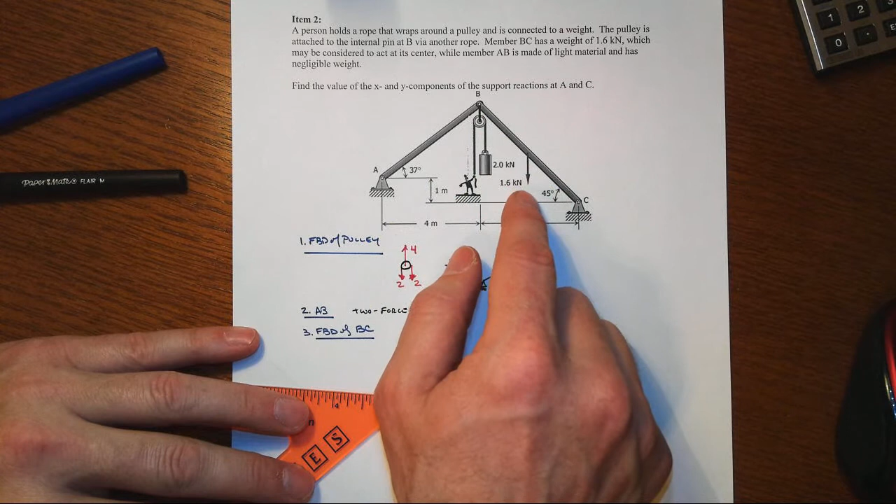And then we also have the self-weight of member BC acting at its center of mass, 1.6 kilonewtons, halfway along its length. AB is considered to be weightless.

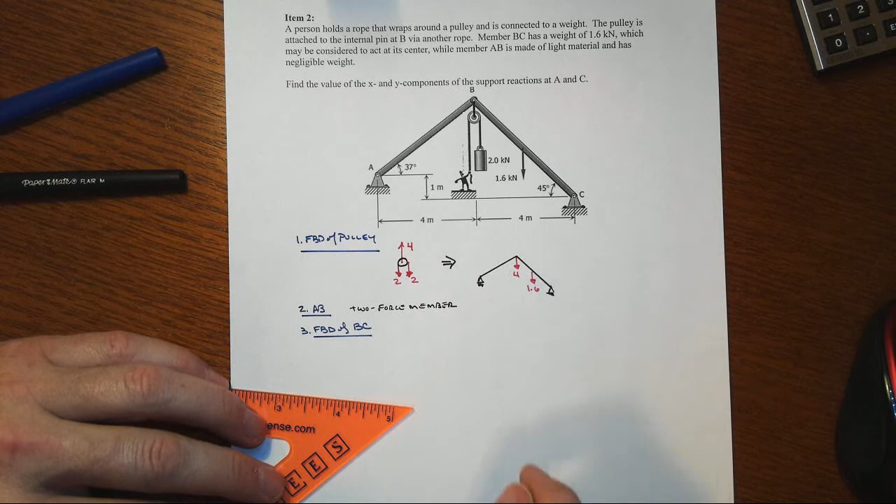You see the angles of inclination. You go look at that pulley, and so with the person pulling down to keep that weight in equilibrium, you got 2 and 2 on either side of the pulley. That means you got 4 kilonewtons that are needed for equilibrium of the pulley, and that means in terms of the frame, what it sees is a 4 kilonewton load pulling down at point B, along then with that self-weight of 1.6 of member BC.

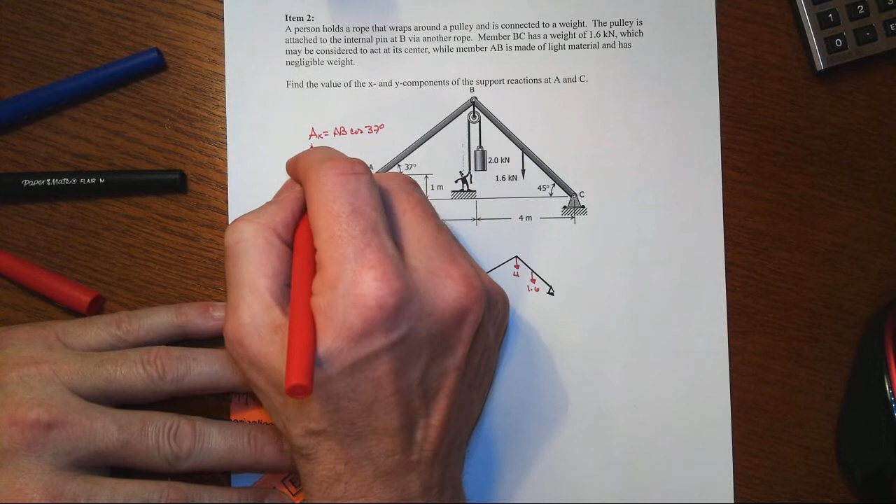Recognize that AB is a 2-force member. That means that when we've been asked to find our 2 reaction components, AX and AY, AX is going to end up being equal to the force in member AB times cosine of 37 degrees, and AY is equal to AB times sine of 37 degrees.

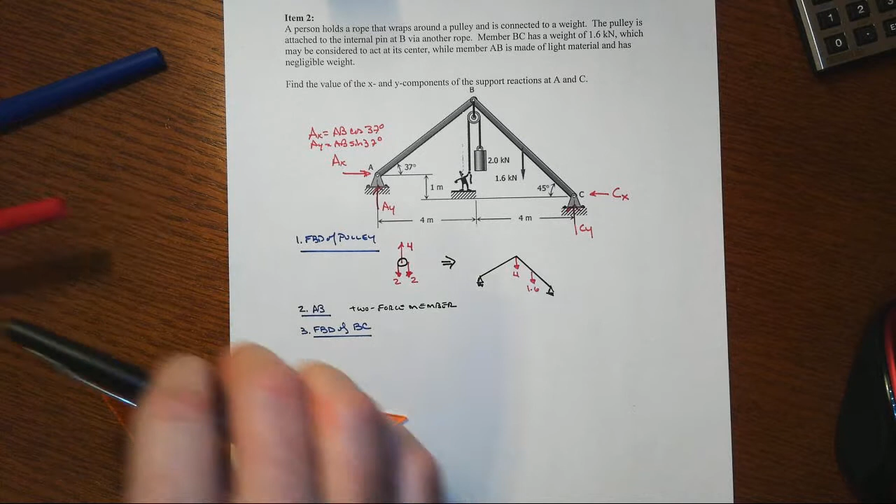Can't say that about CY and CX. We don't know what the angle is that those 2 would resolve along to, because we don't have a 2-force member over there. But we can simplify this problem in the initial setup.

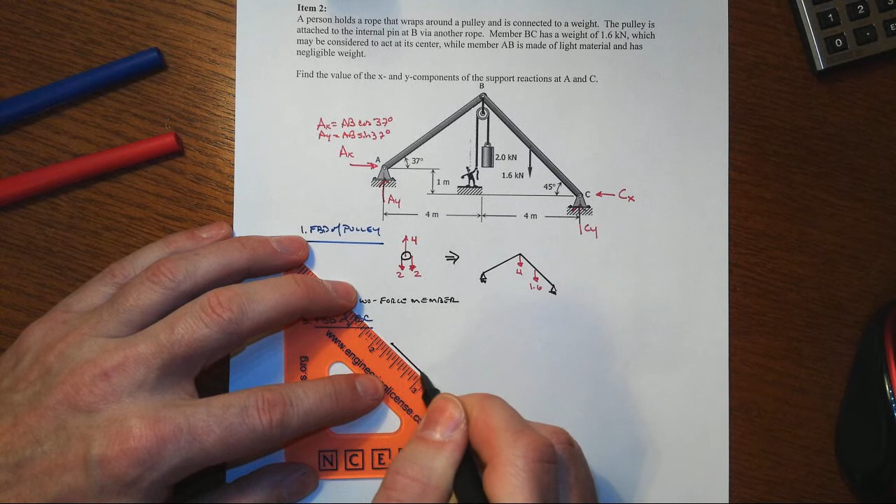So let's go get member BC in and start getting some forces laid out on this body. We got the 4, that's the applied load up there at B, and we got the self-weight, 1.6.

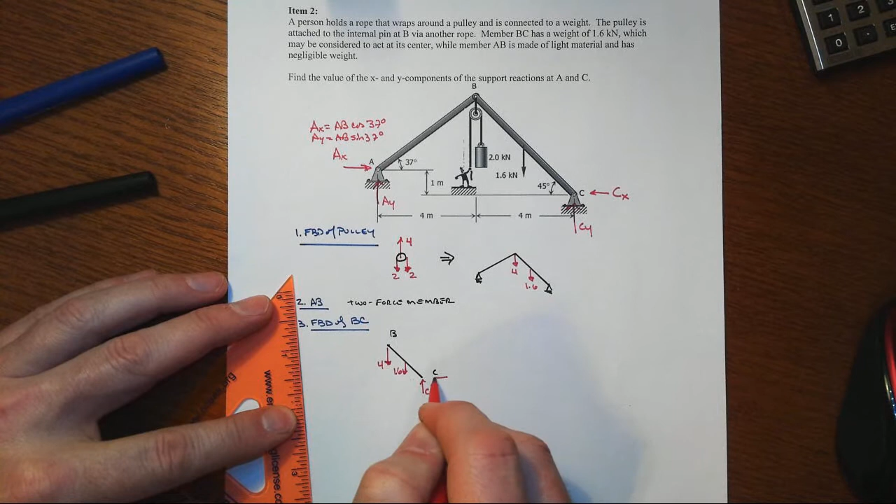We've got then our CY, our CX that are unknown, but we're trying to find them, and then we've got the force in the member AB.

So let's see what we can do here. If we were to sum moments about point C, we could find AB directly. And so let's go give that a whirl. Sum moments now about C.

Say clockwise is positive. And I'm going to decide that I'm going to slide AB all the way down to a place where it intersects this horizontal line coming from C. That means that I get a right triangle that's formed.

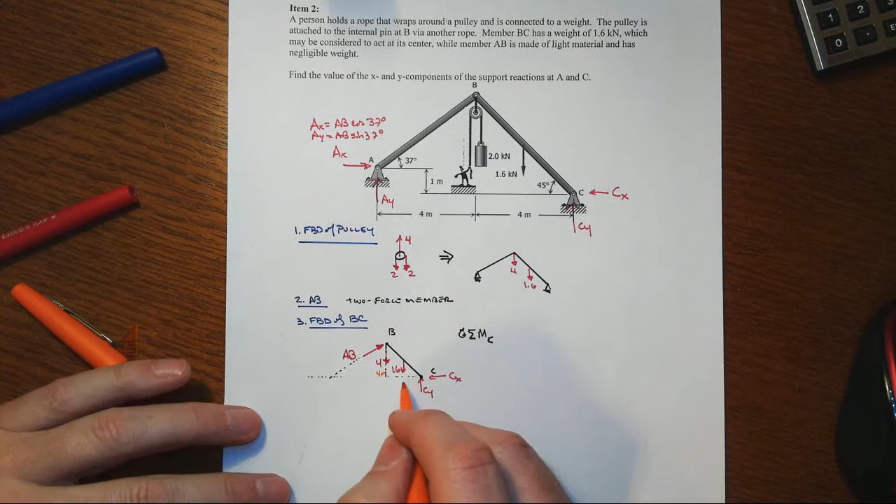Here it is 4 meters high. We've got 4 meters from this point over to C, and so then we just got to go figure out, with that being 37 degrees, what this distance is from there to there. That's going to be opposite over adjacent equals tangent, so that's going to be 4 over tangent of 37 degrees, or equal to 5.308 meters.

That's going to be useful, because now we can break up AB back at that location. When we do our sum of moments about point C, we can take the vertical component, which is going to be the sine of 37 degrees, so AB sine of 37 degrees is...

You know, we don't really care, do we? Because we don't care what the force in the member is. We only care about what AY is, and AY is equal to AB times sine 37 degrees.

So why not just go AY? That's going to translate down to here, right? Times its moment arm, about C, of 9.308. You're going to say, AY doesn't act there, it acts over at A.

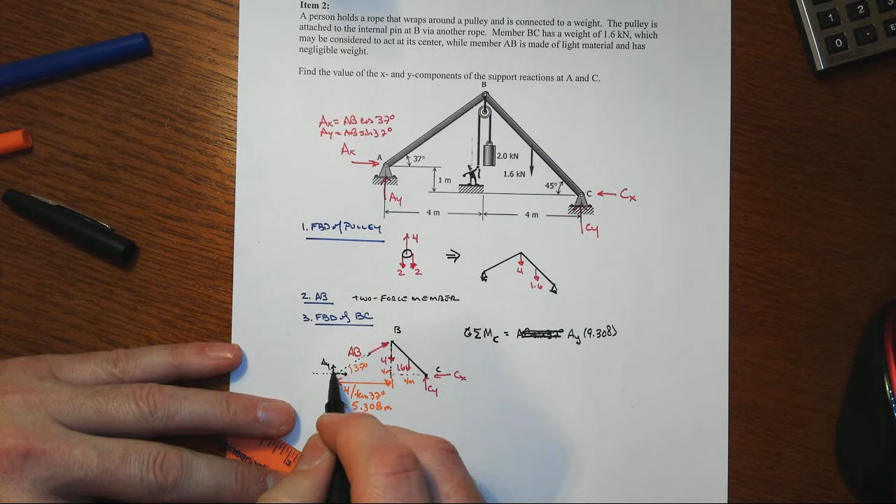But guess what? AY was exactly equal to AB sine 37 degrees. I can slide that AB force all the way along its line of action, and I get back over here to this fictitious point that we could call point D. So it doesn't matter that point A is somewhere else, and I can move that right on over.

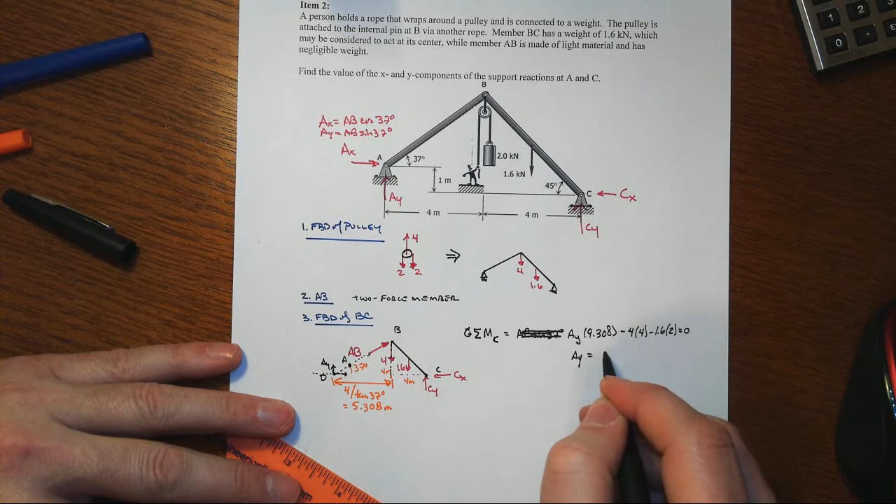So then we get minus 4 kilonewtons times 4 meters minus 1.6 times 2 meters is equal to 0. Solve that, then we get 19.2 divided by 9.308, and it's going to be 2 and change.

19.2 divided by 9.308, and we get 2.063, in the direction we got shown. That's, of course, newtons.

We can then sum moments about... we can sum moments about point D, can't we? Because when we do that, AB goes away, CX goes away, and we can get CY. We like that. Let's take counterclockwise positive. We'll have a moment arm of 9.308 for CY.

And then we get minus 4 times the moment arm 5.308 minus the force of 1.6 times the moment arm 7.308. We got to get the 5.308 plus the 2. That's going to be equal to 0. We don't need the CX nor the AB in there. And so now we would solve that and find out that CY is equal to...

3.537. Pretty cool. All right, now we can go take a look at summing moments about another point where we could slide AB up to another point. Let's call it point E. And so CY goes away, AB goes away, and we'll get just CX.

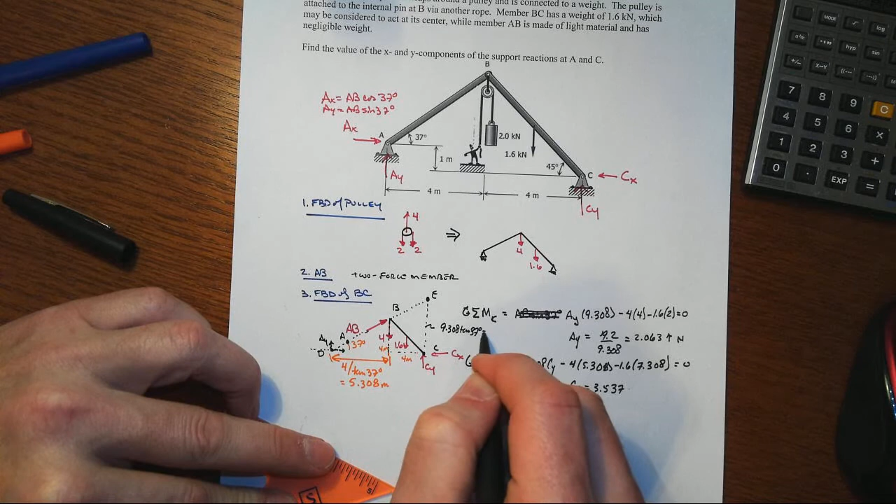We're going to need this total height. That total height, that's 9.308, opposite over adjacent. So that's the smaller one. We want 9.308 times tangent of 37 degrees. And that is going to be 7.01 meters.

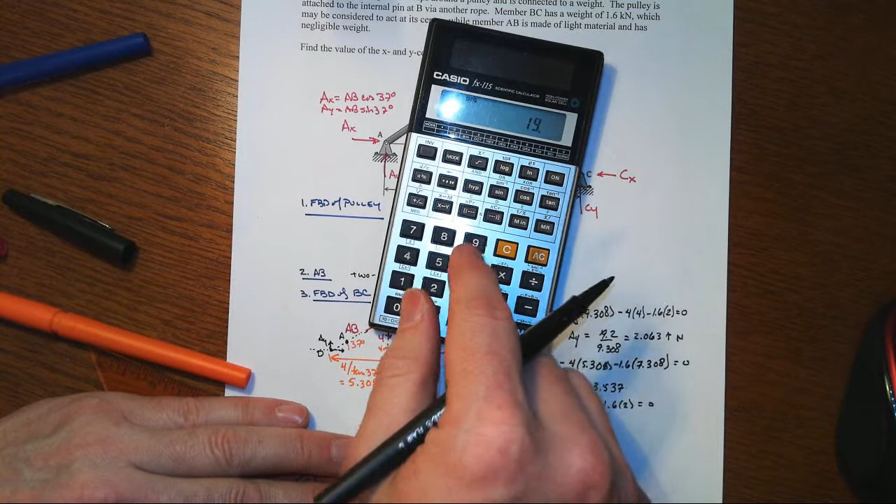So when we sum moments about E, then we'll get, let's take clockwise positive. We'll have 7.014 CX minus 4 times 4 minus 1.6 times 2 equal to 0. So again, we'll get 19.2 divided down by 7.014, and we get then CX equals 2.737.

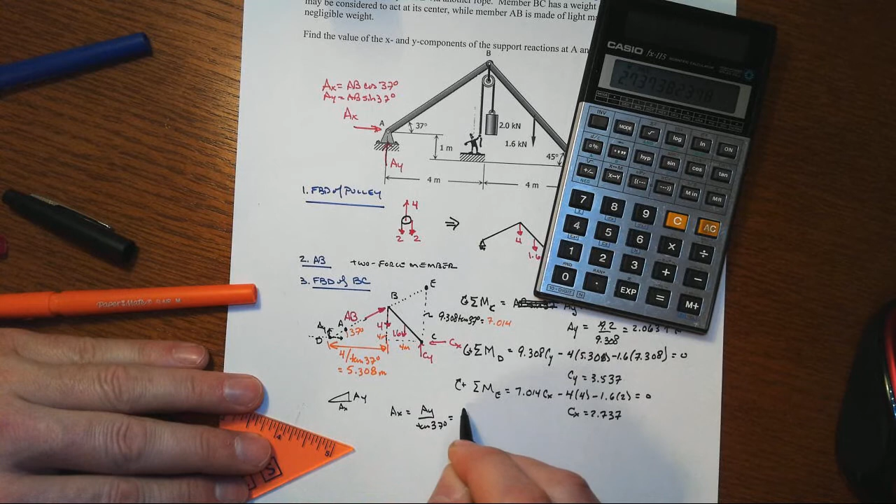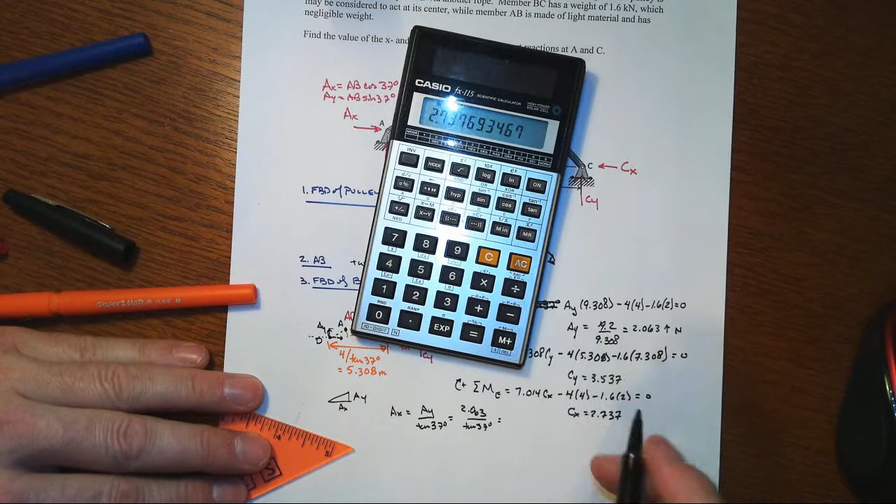Let's check to see if our AX is going to work out right. It should be the opposite of 2.737, but we know from over here that, let's see, here we've got our AY, there's our AX, and so our AX would equal AY over tangent of 37 degrees equals 2.063 divided by tangent of 37, and I'm a little nervous. What are we going to get? 2.737, opposite of CX. Excellent.

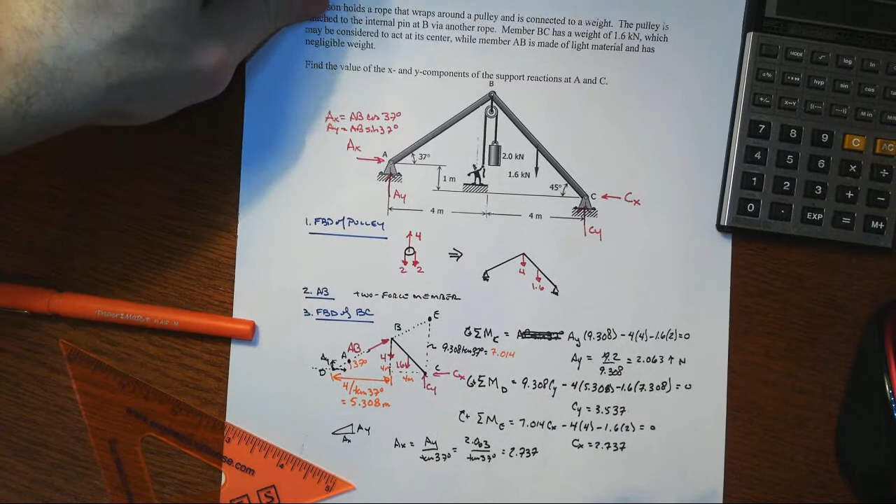So that means we got equilibrium. That way we can check our sum of forces in the Y. I have done so already, and I know that it works. So I'm not going to repeat it here. But I did actually do so.

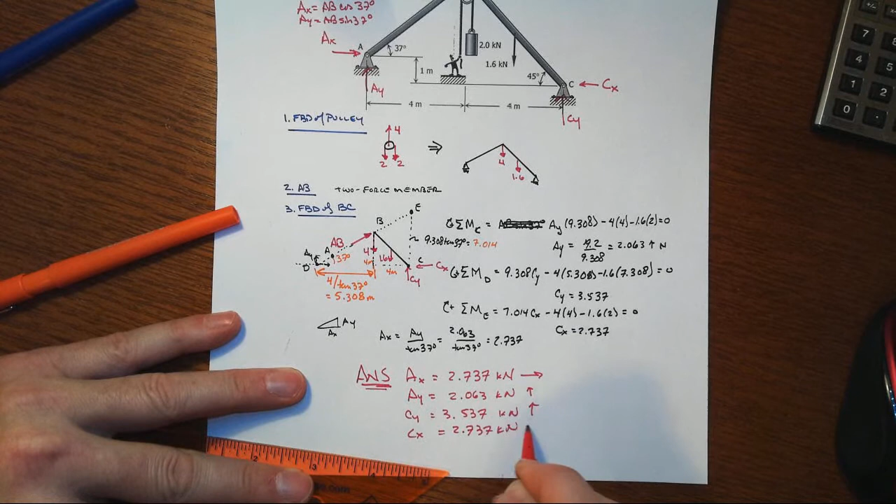So we get, for our answers here, AX equals 2.737, which could really properly be rounded up to 2.74, acting to the right. We've got AY equal to 2.063 kilonewtons, acting up. We've got CY equal to 3.537 kilonewtons, acting up. And we've got CX equaling 2.737 kilonewtons, acting to the left, and as I say, it's probably one too many digits to be included in our answer.